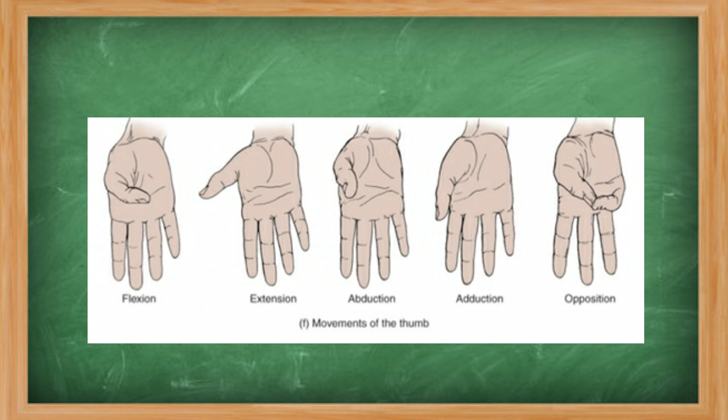First rule, each finger needs to open and close. I know, crazy. Second rule, the thumb needs to not only open and close, but also move side to side and move across the palm. And also, honorary mention, just so it's easy for me, I want a fastener-free design, with all the joints simply snap fitting together. Also, some other rules, but those will get mentioned later, just wait.

Next, I needed to determine how I wanted the hand to move. I knew I wanted to use RC microservos because they were easy to use, cheap, and I had some lying around, but I didn't know exactly how I wanted them positioned. If you've ever seen someone make a robotic hand online, they tend to put the servos in the forearm and run strings up to the fingers for a pulley-like system. But I decided I would put my servos in the fingers themselves, using a linkage system to drive the fingers, while also allowing for a modular design and more simplicity without having to deal with all those cables.

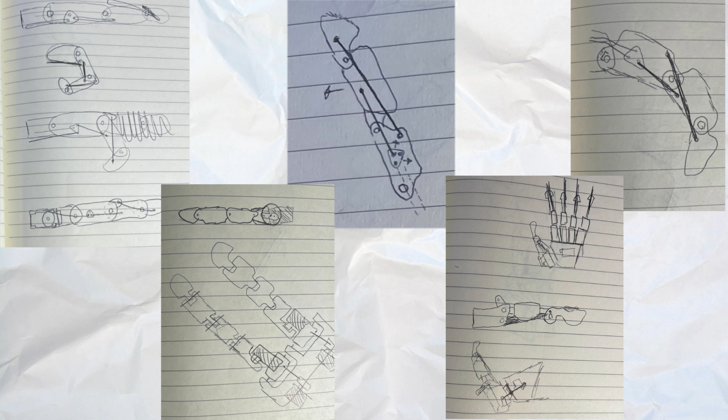Now, you may be saying, what is a linkage-driven system? Well, I have a crazy revelation for you. It's just rods. That's it. Basically, the servo will push one rod, which pushes the other rod, giving the curling motion of a finger.

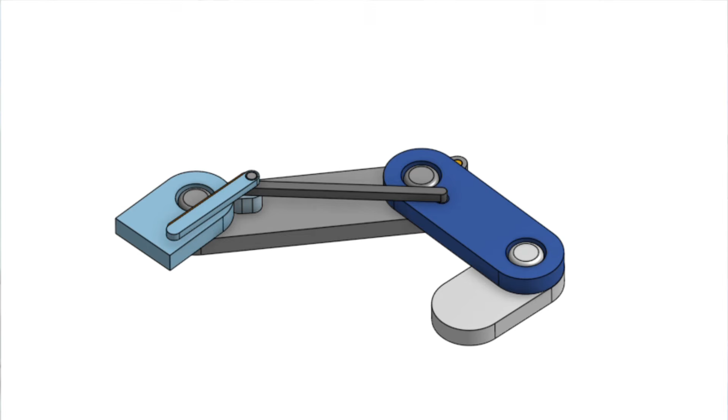So, after figuring all this out, I hunkered down and got to the scary part of the project: designing. So I sat down in my preferred CAD program and made this. And seeing this, you might be like, this sucks. And, well, it did. I printed it, it barely worked, and I went back to the computer and put together this. Now, this design was much, much cleaner and actually seemed to work. This design included a slot for a servo to insert directly into the finger, a mounting rail on the bottom for later, and a moving finger.

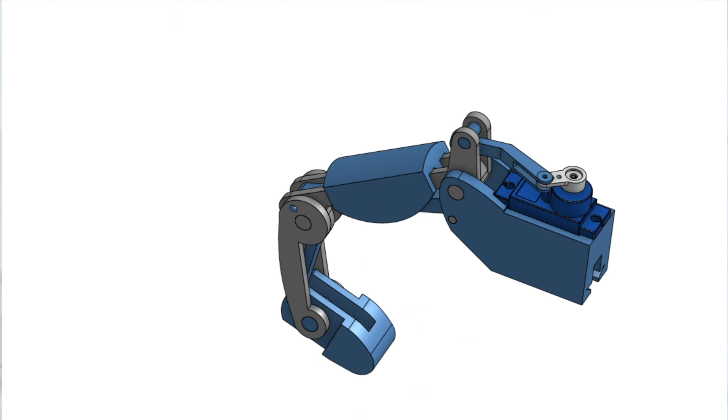Originally, I was going to make the entire design gray, but decided to go with gray and blue. And you might ask, why blue? Blue's stupid. And I'd reply with, that's all I had lying around. So after finishing this design, I sent it to the 3D printer, and following the mishaps that come with owning a printer that's seen better days, I had a working finger in my hands.

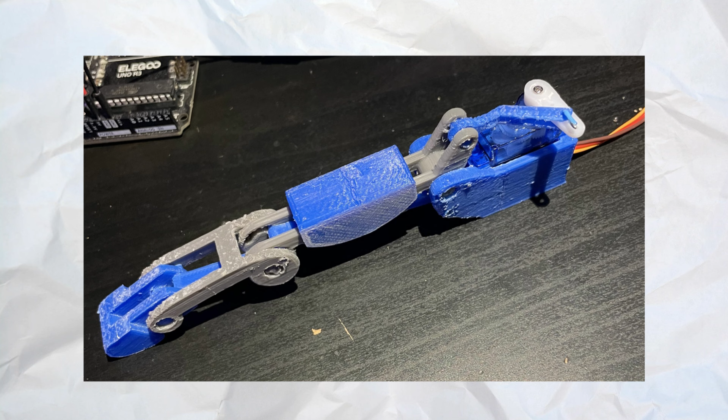Following this, I went straight to designing the rest of the hand, while at the same time printing the rest of the fingers. And this is where this project started to get to me. You see, earlier when I mentioned my goals with the project, there were a few I left out. One of those being the concept of adding angular movement to the fingers. Most people leave out this crucial aspect of a hand's movement, which is commonly referred to as an abduction-adduction movement, where your fingers can not only open and close, but also can move angularly up and down.

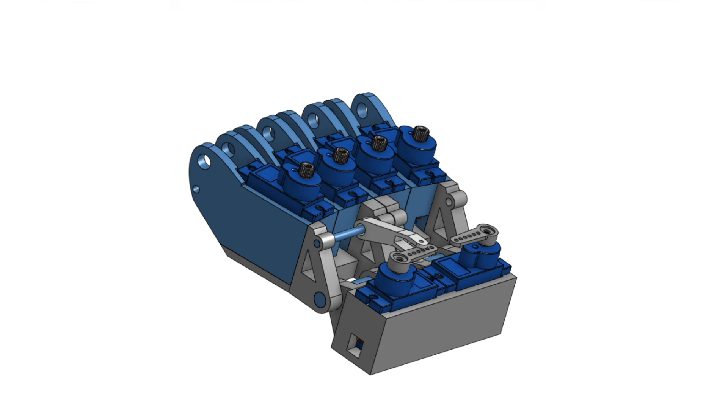This movement adds so much to the hand, and I just really wanted to add it to my design, but I just couldn't fit it in there with all the servos. Here's my attempt at it, and as you can see, the servos take up lots of room, and wiring this all together and dealing with and controlling all the servos would be a nightmare. So I decided to scrap this and hopefully come back to it in a future iteration.

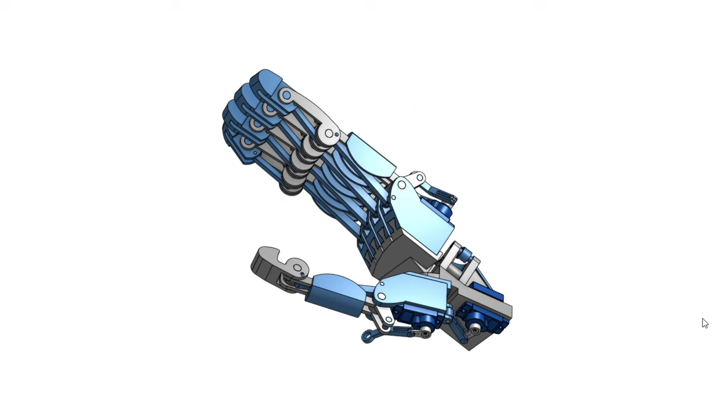So after all this work, I had come up with this design for the hand, including all 4 fingers as well as the thumb, which was the same design as the fingers but slightly shorter. Here I was able to achieve one of my original goals for the thumb, having it open and close, move side to side, and move across the palm. Now, let's take a break from designing and go check up on those prints.

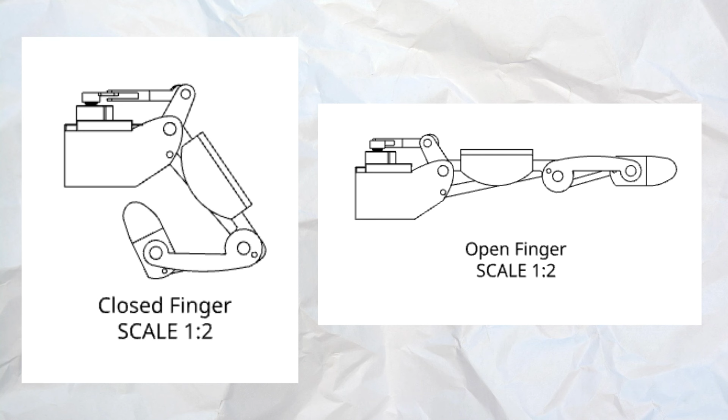It took me several weeks to print the other 3 fingers because my old Ender 3 is hitting that point where I might just need to old yeller it and take it out back. But through the pain, I had all the parts I needed for my fingers, which I proceeded to spend another week putting together because of printing errors and lots of sanding being needed.

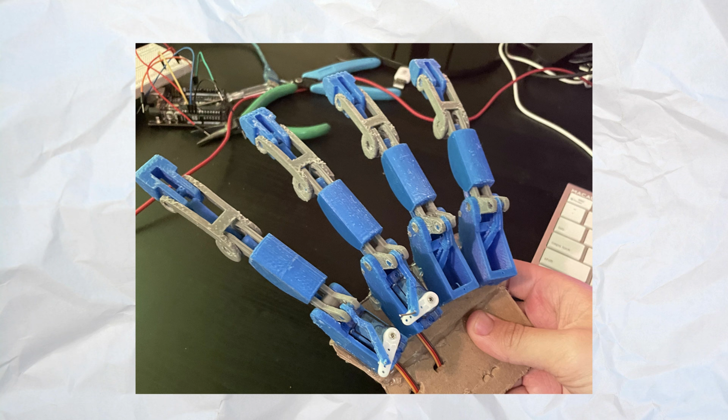And here's the hand's current state. I've got all 4 fingers put together, some having servos and some not, all attached to a piece of cardboard because I haven't got along with the printing of the full hand. Here, I've definitely learned from some mistakes in my original model and seen where it needs improvements.

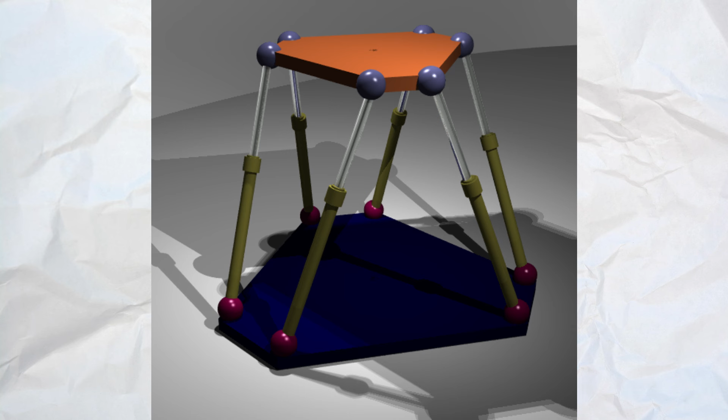After that, I took a break from printing and went back to designing because I wanted to figure out what was next. I needed to determine how I wanted the wrist to move and ended up deciding on a Stewart platform design, aka a parallel manipulator, allowing for precise movements along multiple axes. A Stewart platform, according to Wikipedia, is a type of parallel manipulator that has 6 prismatic actuators. Now, most real designs of these things use linear actuators, which isn't what I want, so I decided to make mine with microservos.

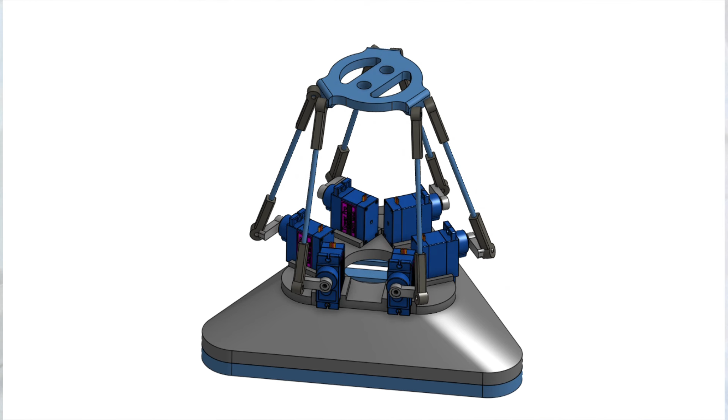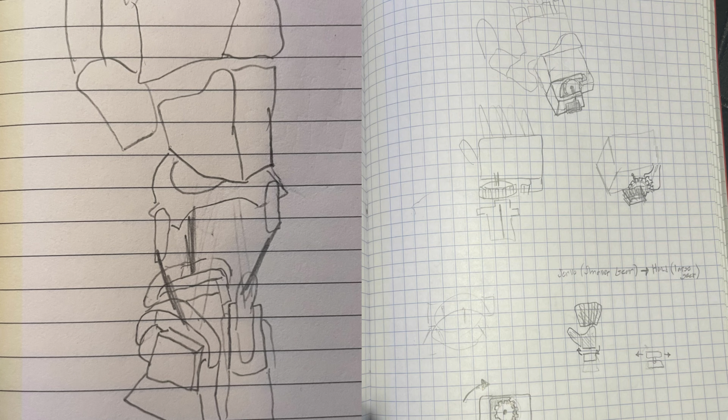Proceeding to design, this is what I came up with. And seeing this brought me to the realization that all of these servos aren't that necessary for my goal of creating a wrist. So I went back to the drawing board and got rid of a few servos. While the Stewart platform is a 6 degrees of freedom parallel manipulator, I realized I could get away with the same movements out of a 3 degrees of freedom version that has 3 servo joints in the base, 3 ball joints in the wrist, and 1 more servo joint at the top, allowing for rotation of the wrist.

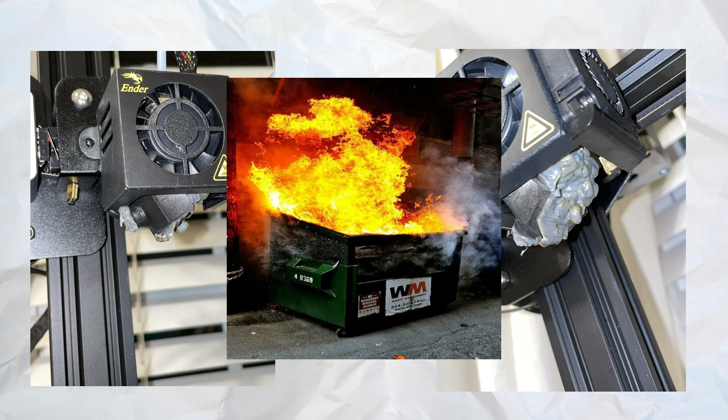And this is where I've stopped for now. I've started redesigning the fingers after all the problems I had putting together the original design, and I've assessed my situation. Right now, my biggest setback is printing errors. My Ender 3 just isn't meeting my needs anymore. In the future, I plan to upgrade to a printer with better specs and ease of use, since I no longer have the time to constantly troubleshoot and tweak it. I'm considering a Bambu Lab printer or something similar.

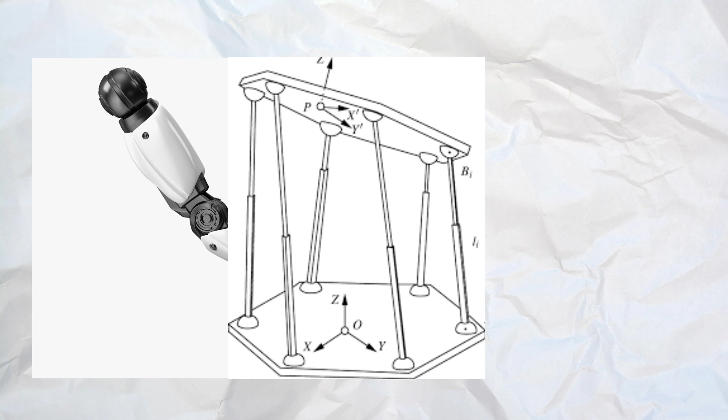From this point on, I also plan on working on a full arm design, integrating the wrist into that design, and also determining how I want to control and code this project. Right now it's rough. I've got cardboard, broken prints, and fingers that don't always move.